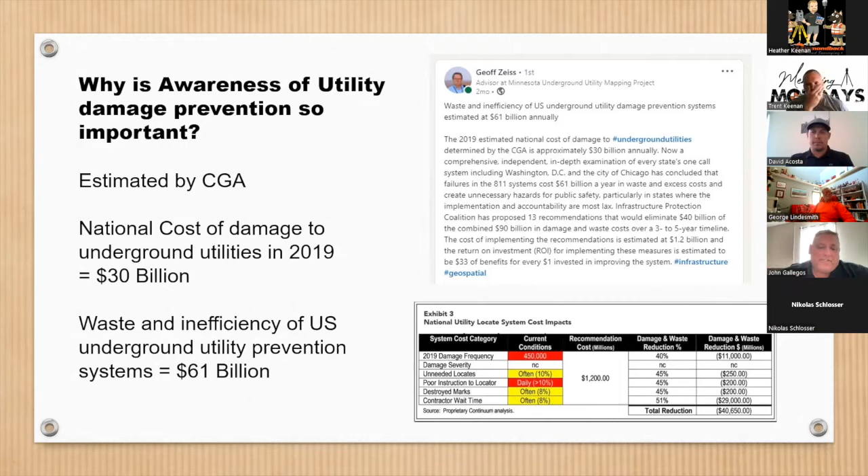Okay, so moving into the guidelines, the ASCE guidelines. American Society of Civil Engineers is the ASCE. So we've been following their guidelines, especially when looking at the level D, C, B, and A process, and we're going to get into that here and give you a refresher. But it's basically laying out how these rules are going to be.

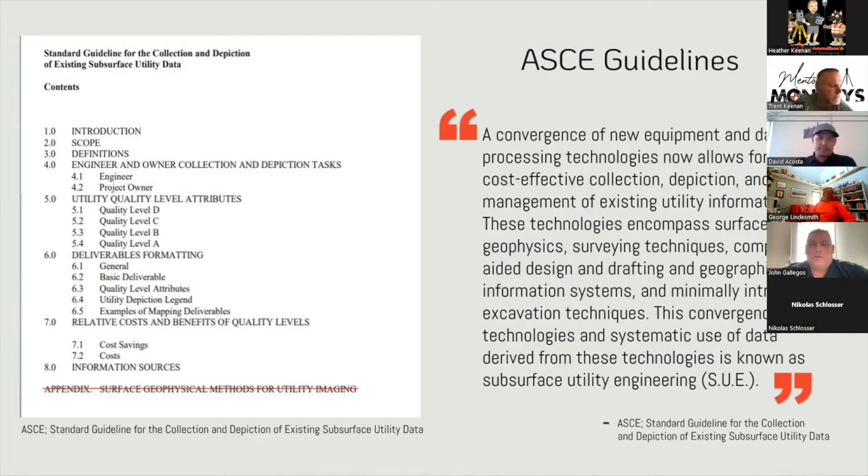One thing I found pretty funny about this document is that it has the word survey in there 25 times. I counted them. So I'm convinced that a surveyor is going to be pretty key in this process, and maybe that's why not as many engineers are familiar with it, because it's kind of a survey thing. Me and John always discuss how utilities might be brought into more of the survey world and thought of as an actual survey. We are making 3D measurements at the end of the day with survey grade accuracies, looking at maybe a particular flavor of surveying specified as utility surveying, and maybe we'd be able to adapt some of these rules, or at least meet halfway to have a great understanding between the two on how we can cooperate, because we're both going to be necessary to this process.

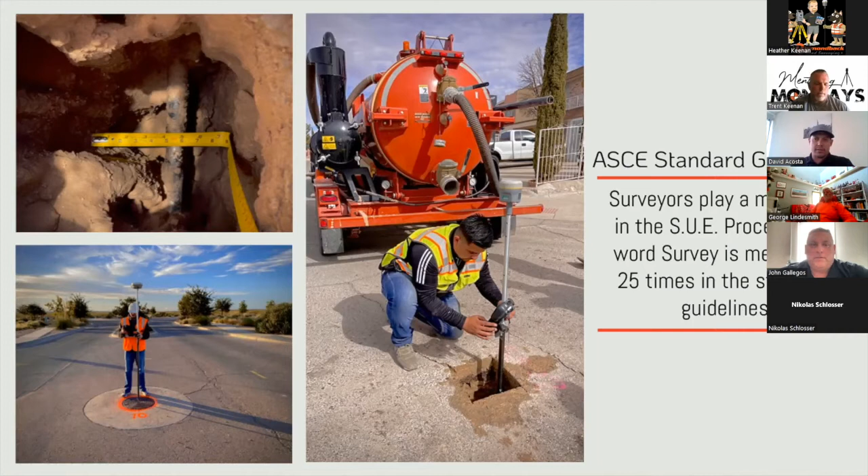So when we look at the SUE process, we have levels D, C, B, and A. The way this works is it's basically a buildup on itself. You're starting from scratch, kind of digging. It's an investigation that we're doing here. Me and John have compared this process to doing a boundary survey, where you go out, do some research, go out into the field, collect some points, bring it into CAD, maybe doing a little more research if necessary. You look through your data, go back out, do another search, and before you know it, you start to come up with a solution. So it's sort of similar in that nature.

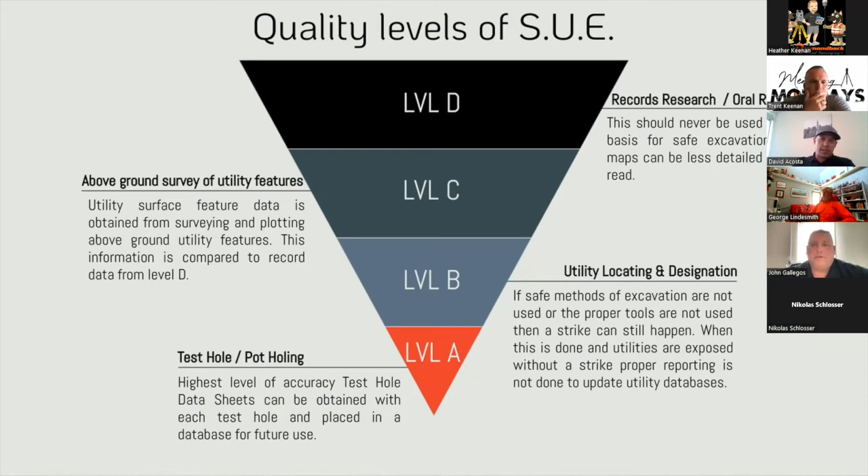So just to expand on that a little bit, I'll let John talk a little more about records research and how important that is. Oh, I think you're muted, John, sorry. My apologies. There you go.

This is one of the most important processes, and my mapping background goes a pretty long way. We used to use Leroy lettering back in the day, but I always used to see these piles of maps that used to sit in some person's corner, whether it's a surveyor or a facility person. And I was always curious, let me go dig in that pile or this pile. It was like unboxing a present, or finding a treasure. But recently, this is simply doing your diligence in terms of research, going out there, knocking on doors, being able to go in there and just talk to people, buy a person a cup of coffee or something like that. Say, hey, do you ever remember installing this line?

It's a lot of the same process as being able to do a boundary retracement through parol evidence and some of the other things. But this is the beginning stages of the information. That way they give you the oral recollection, because a lot of times the ones that know where they installed this are getting ready to retire, or have maps that aren't digitized, or they sit somewhere, and we don't know at this point whether the information is accurate or it's installed or it's abandoned or anything like that. We're just happy to get our hands on something.

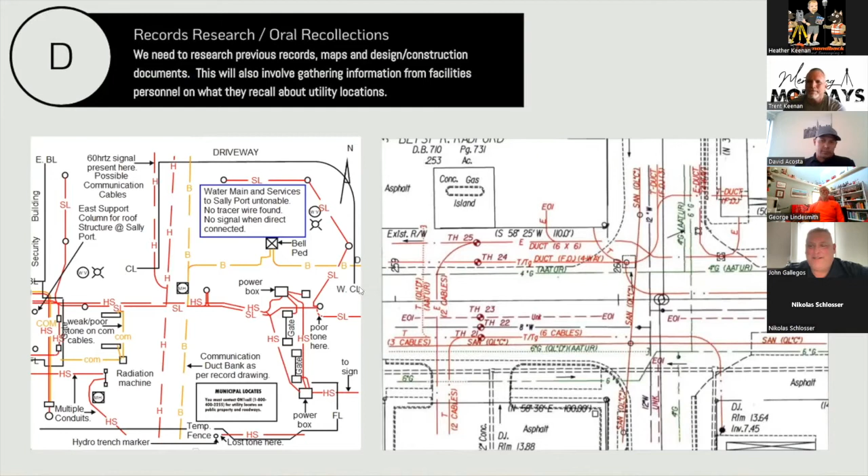So moving on, part of level D, I have a slide here on 811, because calling 811 is going to be part of the level D side: ordering that ticket for the utility owners to go mark out where they think the utilities are. And again, even on this, you're never exactly sure what you might be getting out there and how they're going to be marking those utilities. What type of information or tools they are using to do that is where it gets a little bit different from place to place.

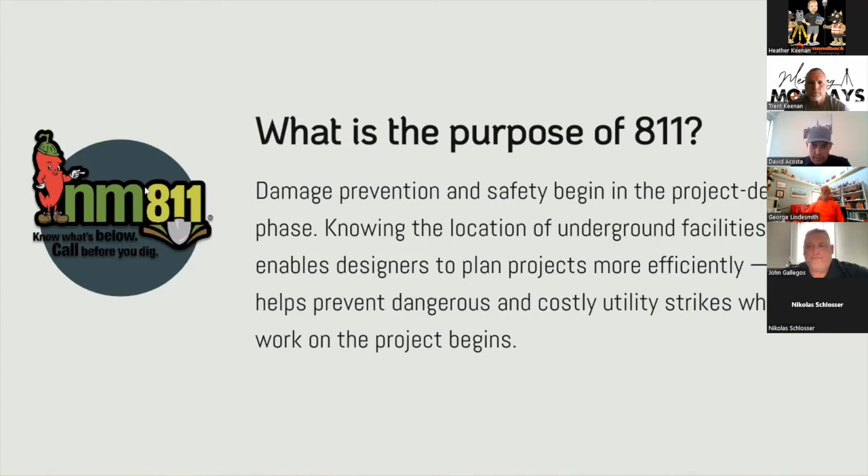Let's see, there is a difference between 811 and having a private locator, which we would be considered. One of the biggies is going to be that 811 is not going to mark utilities on private property unless there's easements or license agreements on there. So if it's a private property, you may not always be getting that extra layer of search occurring.

Calling a private locator is going to add an extra layer of risk management for engineers and utility owners. A lot of times, we're going to call 811, go out there and verify what they have marked, and compare that with any maps that we may have, or easements, or that type of information. With that being said, utility owners don't always know the exact location of their utilities, and there's a lot of undocumented utilities out there.

We were working on a project, I think it was last year, where we did a SUE survey and we found a gas line that nobody knew where it was. It wasn't marked by 811, didn't show up on any maps, nobody knew about it, but it ended up really impacting the design because they didn't have a lot of room to begin with. It was a road going up to the mountains. It was valuable information to them, but I'm sure they were frustrated. But better to have had it occur like that than they get into construction and, oh man, we have a gas line here that nobody even knew about.

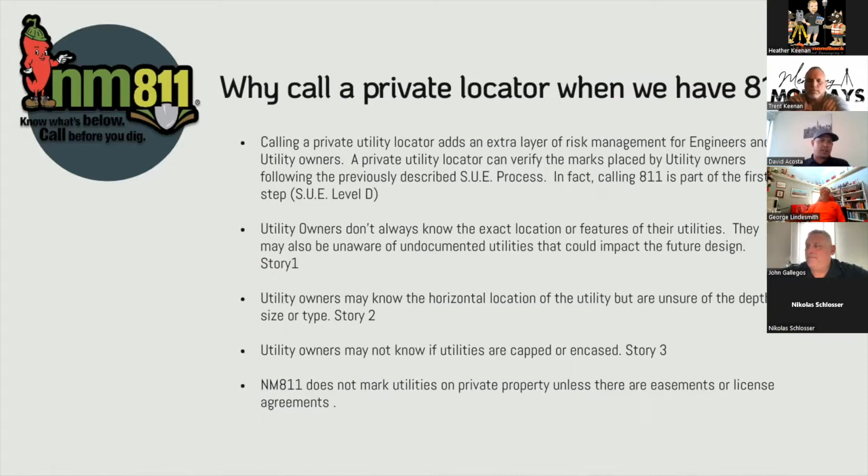Another situation that happened to us: we were consistent with where the utility owner had marked it, but they didn't realize that it had a concrete cap or it was encased. That was going to be impactful to the design, so it was valuable for them to know. So it could be a little bit of everything, right? At the end of the day, it's an extra layer. It could be considered some type of insurance that you're paying for that's going to clear you of any of these utility strikes.

And I would also like to point out to that great point, David, that the utilities industry is really probably 80% in a reactive mode, because there is so much old infrastructure in there. They do not know what's operational, what's abandoned. They don't understand how valuable the level A through D process is. A lot of times they don't budget for it because they do not know how to utilize that process.

In the first part of the design, there are situations with engineers where we said, hey, let us do a case study where we're going to do the process. We'll do all our GPR, all of our level B through D structure. And this is when an engineer had already had a concept designed for a roadway and some retaining walls and stuff. And he said, sure, go ahead and do that.

Well, when we presented him with our SUE survey and our topography survey, when they got the information, right off the bat in their conceptual design, there was no way the wall was going to work because there were fiber optic lines and a bunch of things in the way. So they had to kind of rewire the way they were thinking with this information up front, because they didn't realize how valuable it was to have it in the early stage of the design.

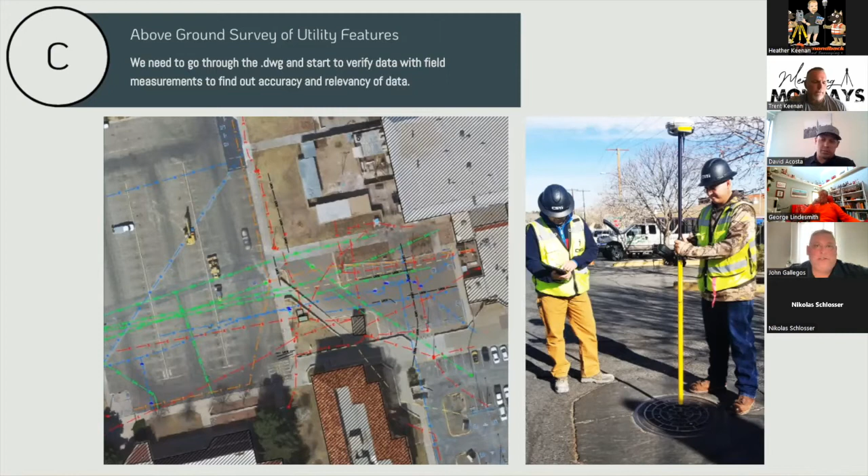And the advice that was given to me was it takes time. You've got to do it, and the more you do it, the better you get at reading those hyperbolas, as they call them, and having them tell you a lot of what's going on there. One thing about GPR, and we'll get into this a little later, is GPR itself is also not a silver bullet. It doesn't always work, but then again, it does work. It's been a good tool for us, but it's definitely not a silver bullet. We do have a lot of redundancy in the tools, and I'll get into that as well a little bit later.

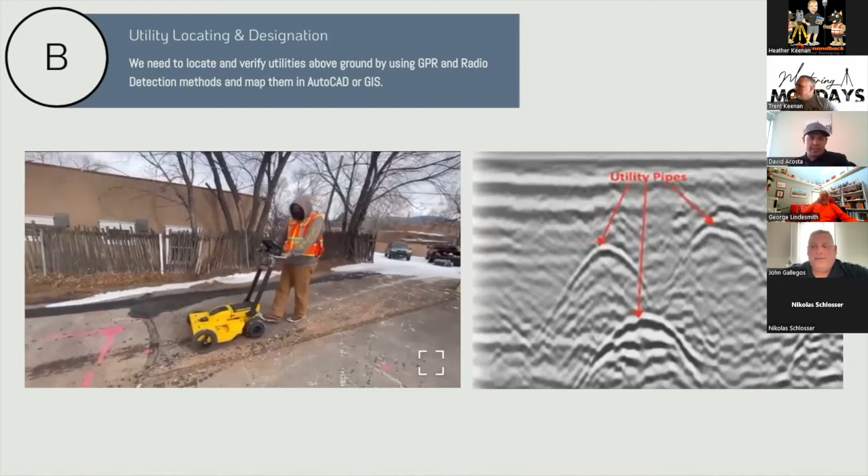So usually, like I said, at this point, we're turning data over to the engineering group, and they're going to do their conflict analysis, throw their design in there, and start to understand what kind of conflicts might happen. And then they're going to order the test holes. We call this survey CrossFit, because digging test holes is definitely a physical job. Anybody listening that's ever done it is probably shaking their head in confirmation. It's not your typical survey activity.

We're dealing with vacuum trucks and high pressure water, high pressure air, a big concern for safety. We're in the road. There's a lot going on. Sometimes we've got to get barricade permits and all kinds of stuff to do these test holes. It's a lot of work. And one thing that bugs our group more than anything is when we have a miss. There's nothing worse than digging this hole with all this work and there's a miss.

So we really try to go above and beyond before we excavate, to have redundancy in information so that before we start digging, we have a lot of confidence that there's going to be something there. And so we pride ourselves on our hit rate. Most of the time we're hitting utilities. There are some misses sometimes, but overall we have a pretty good hit rate.

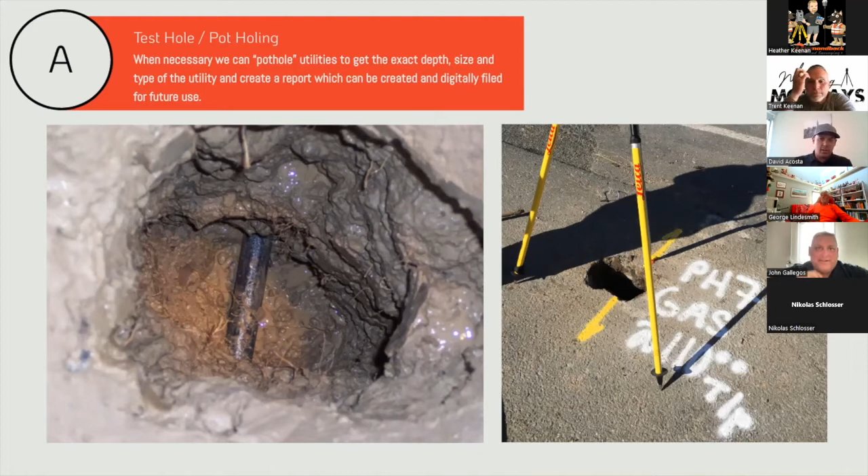And then you start to wash it, you're sucking up the dirt, you shine the light in there, and when you see this utility, yes, we did it. It's a good feeling. It all came together, everything from the beginning. This whole process, and here we are. So it's really a cool thing. And I think it's important to point out too,

when 811 places markings on the ground here in New Mexico, the buffer of accuracy is plus or minus 18 inches from the center of their mark. So you have a 3-foot window. So if you're in the middle of a street and you've got to dig a pothole about 10 inches in size, and you're plus or minus 3 feet, that's a 3-foot patch you've got to put in the ground, and you've got to take the soil out, put it back and compact it.

So that's why the quality of information, from D all the way through A, is important, and why it's important to initiate these processes and have a good hit rate. Yeah, and there's no other way to tell the exact size and type without physically seeing it. Up until that point, we're using these tools to make those assumptions, but we won't truly know until we've dug the test hole.

So when we were working on this, it made me think about the accuracy and precision diagram that we had back in school. You have a mark on the ground, and typically it could be 811, it could be anybody. The survey crew doing a design topo is going to go over there, see that mark, shoot it right in the middle of the mark, and take it back to the computer. The engineer may think, oh, this is survey grade information. Where they shot it is the true location of this utility. Let's go ahead and do some design.

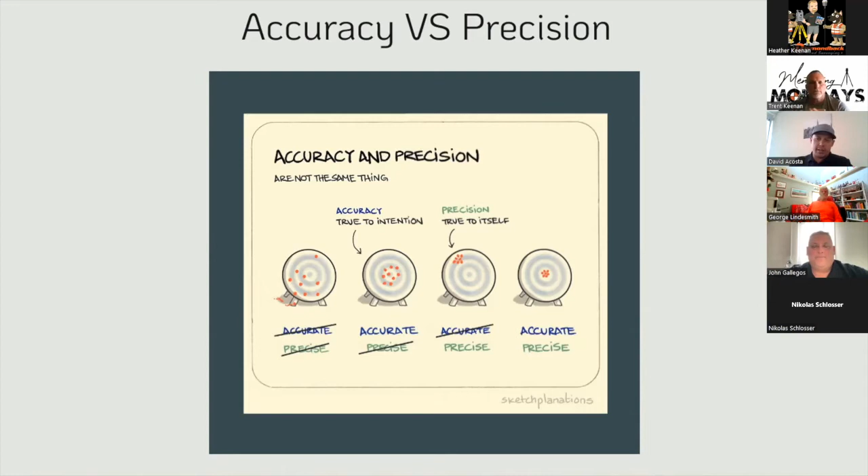But when we can have this here, that's when accuracy and precision line up. If I can physically put my rod on the top of that pipe, accuracy and precision, or if I can make a reference mark above ground that has a direct measurement to that, we have accuracy and precision. Now we're really surveying. To me, this is surveying right here. We're lining up everything. It's not just an idea, not just an assumption, but here it is, some good hard information.

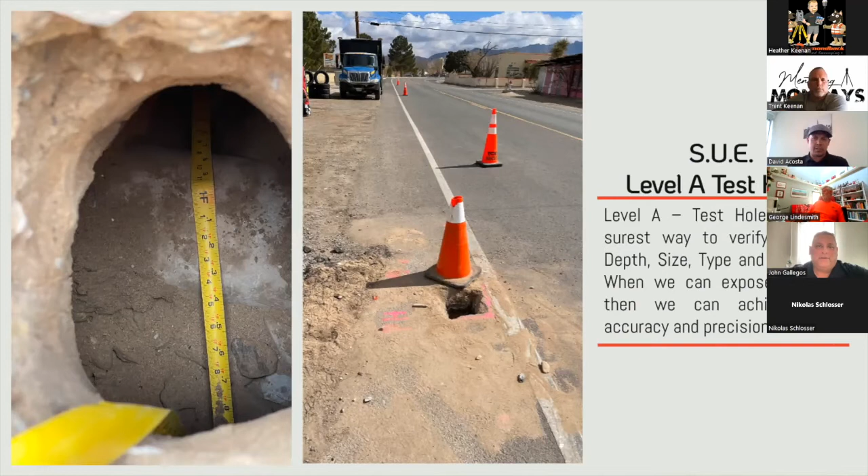I think another good thing to add is to pay attention to these 811 locators. A lot of times they don't have an instrument in their hand. All they're doing is marking the same mark that they placed on the ground with flags and all of that. How do you know that it's not over here? Or how can you tell them, hey, I actually found the utility 4 feet over here? How are you able to convey that message to them? Again, putting paint on the ground is different from actually doing your diligence, using the equipment and putting the records together.

And a lot of times we'll dig these holes, and because we always put reference marks in line with the utilities, they serve as a point of awareness. So when somebody comes behind us and 811's out there, they're going to say, oh my God, the gas line was over here, but wait a minute, there's a pothole right here, or a test hole or keyhole. I better move my line over, because now it's 18 inches in this spot, but we don't know what it's doing another 100 feet down the line. So we are essentially creating additional awareness by putting those reference marks on the ground.

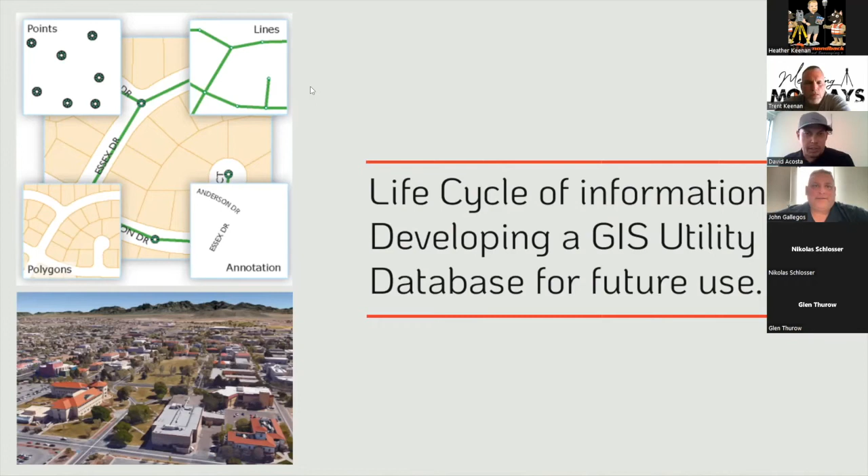Like John said, it's leaving information, footsteps for the people following behind us, and being able to leverage GIS and this tool I'm going to have in my pocket anyway, plugging in some great information. Because something is better than nothing in a lot of ways.

So we look at this data life cycle here. We've got a new project, the design survey and the SUE is ordered, and then the design goes into design phase. We have a double arrow here because sometimes stuff could happen and we have to go back to SUE or back to design. But then the design's completed and goes into construction.

We do the as-builts, and this is key, because the request for the as-built has to be proper. Otherwise, if it just says as-built survey, what the heck is that? Why not be more descriptive on what you want out of the as-built survey? It could even be a utility as-built survey. That as-built data can be moved into some sort of database managed through the continuation and life cycle of that site or building.

Things could be changed before something really major takes place, but then we go into the new project. So it's all a regurgitation of this information on a site and this life cycle. The more we can get better at archiving and cataloging this information, what's being done between projects, we're going to start projects in a lot better place than just starting with nothing at all. We want to encourage our clients to consider this, so we're making better use of funds coming to these projects, and it just makes more sense to us.

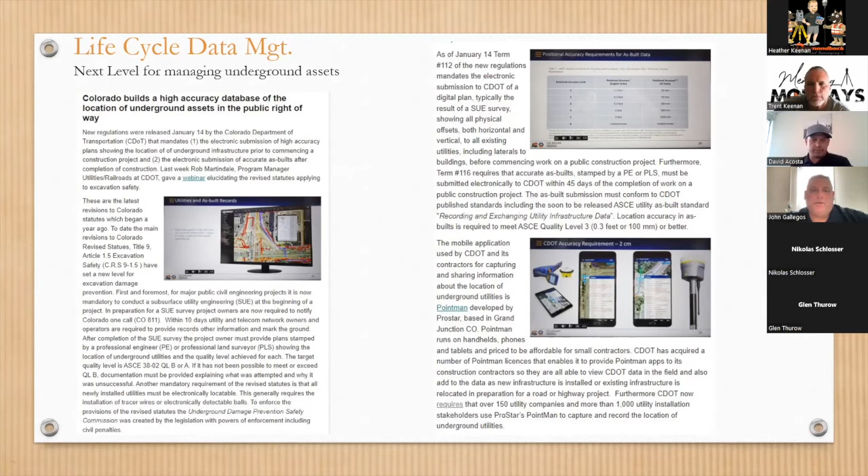So again, developing the database - this was some stuff for New Mexico State, and we were talking about mapping the whole campus. Whoa, the whole campus, that's a huge undertaking. That's probably not a great idea to go attack all at once. But what we can do is look at areas where people are going to be working. Let's look at the master plan - where are we going to be operating under, and how can we start to narrow it down there? It was kind of an idea for a lot of municipalities that want to start implementing this, because it's a huge undertaking, especially with bigger cities.

John mentioned a little bit about BIM. BIM is going to probably be a Mentoring Mondays topic all in itself, but it's pretty cool. It's using the same idea from design to asset management, facilities management, and all the way back into construction. It's a great process that can be followed to achieve that. And it's a cool thing, so if you've never heard of BIM, I recommend you investigate it.

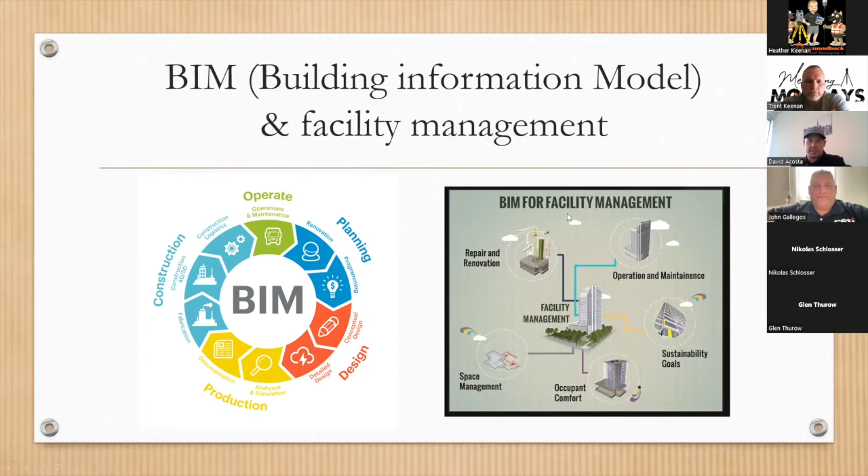Okay, just to talk a little bit about the technology - I think we have a few slides left here. CSTi, we really love technology. We're always wanting to get the latest and greatest that we can have available to us. It's just kind of what we like doing.

So down at the bottom, you can see a few of the GPR receivers that we have that are all GPS integrated - that's GPR with GPS. When my friend first told me about GPR, I thought he was saying GPS, and he's like, no, GPR. And I'm like, what is that? Oh yeah, you can use it to look for voids and all this stuff. They use it out here in Texas a lot.

And me and John had already been asked enough times about utility locating that we thought, let's give it a shot. So we rented our first GPR system, and it was delivered to the office, and we pulled it out there, and we were like, what the heck is this thing? It just did not look like a survey tool or anything we were familiar with. And we went out to go find some utilities that day.

I was looking for a high pressure water line, which from my experience is one of the more difficult things to find. And I'm so frustrated, I'm turning red a little bit because the contractor's looking at me like, hey man, I thought you said you could mark utilities here. And I called the guy that rented us the GPR - hey, what's up, man? I'm having difficulties out here.

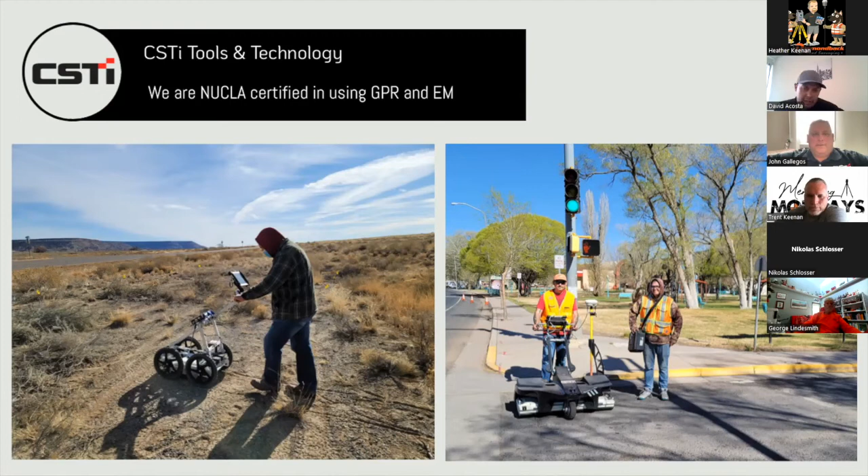And then with the GPS integration, it's cool on there because it's all going to be geo-referenced when you plug the data into the software and putting it into design drawings. Everything survey grade, geo-referenced information. So it's a really cool combination of tools to put together to do what we like to call our utility survey, because we're using survey tools.

We talked about the redundancy with our tools. And so we're talking about using GPR, electromagnetic detection, radio detection, all materials locator. That's the tool that they're using on the bottom left. It kind of looks like a paintbrush, but it's been effective for us as well. CCTV is another tool that's commonly used. And then also the dowsing rods that we talked about.

And dowsing rods, this is always a fun subject to talk about, because some believe in it, some don't. I don't know why, but recently it just hasn't really been working for me. I don't know if I'm thinking about it too much or what, but John gets them in his hand and they just happen to work better for him.

And one day we were standing there with a guy that's a physicist, right? What was Carrie's friend? A physicist, right? He's an archaeologist. Archaeologist, but he was doing some crazy stuff with those dowsing rods.

He would call out your name and then it would move to you. And he'd be like, John, and it would move over there. David, it'd move over here. And it was just kind of funny.

But there are some cool tricks I've seen where you're holding the rods out, and when you go over the utility, they move in, right? They move in like this. And when you walk away, they move out. So you're over some sort of object under the ground when they're like this. Then I've seen people stomp their foot and then the things go out like this and then they come back. And however many seconds that took is however many feet underground it is, right?

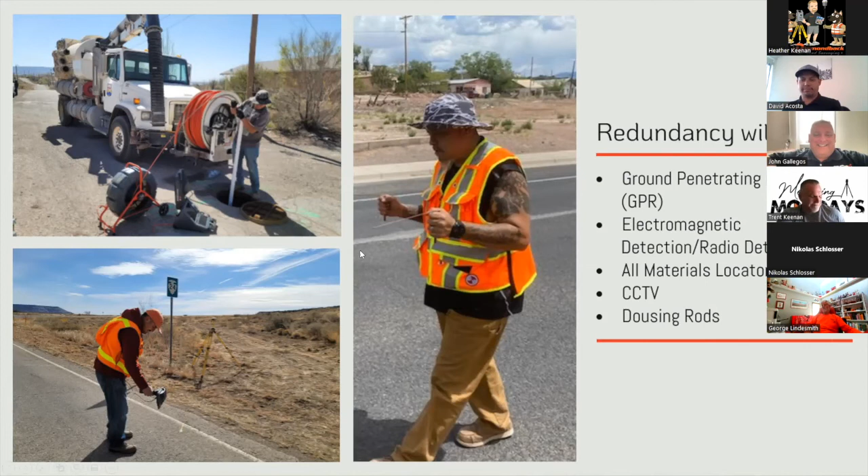So just since we're talking about tools and technology and GPR, there are some GPR misconceptions, like I mentioned earlier, that it's not a silver bullet, it doesn't work every time. How accurate is GPR is the question we get a lot. And so it's a loaded question when somebody asks you that. When anybody asks you any of those questions that we're looking at there, the last three, it's a loaded question,

because we live in the desert here. There's a little more sand, there's a little more air in the soil. So we might be a little bit more successful with it here. So there's just a lot of, and John, maybe why don't you speak on that a little bit.

Yeah, it all boils down to soil condition and application. You have to do your diligence in terms of looking at how you have to do a sample size in the area in order to be able to know what the expectation is, because you don't want to create a false sense in the industry, or oversell GPR, and say, oh, it works in soils and all this and that.

Yes, there's a lot of things you can do, but there's a lot of post-processing, a lot of different things that you have to do to apply to that condition. But a lot of times you simply cannot get there. It has a limitation. And it is a loaded question.

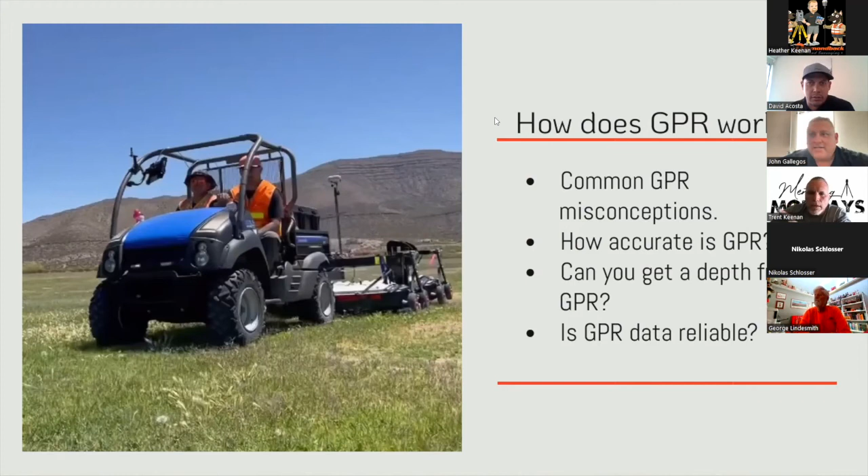Oops, I gave you the one. So this is just putting records together. You got the typical grid, sewer, fiber optic. Wait, are you sharing it? Yeah, I thought I am. Let's see. Let me stop mine. Oh, yeah. Okay, there you go.

So this is a project in Albuquerque, 12th and Sawmill area. You see the water, you see the sewer, you see the fiber optic, and this is all a combination of C and D data. So the next step is, let's go out there and do the blind taste test, get our GPR out there and have him just do what we call interpretations, looking for all the obvious pipes and all of that.

And at the end of the day, when we extracted that, the magenta lines are the lines that he was able to look at. So you can see that there's a considerable amount of utilities in there with the GPR that they would have never found just through the records. So again, here's without, and here's with. So those are all the anomalies, right? Right, because we don't know what they are. These are patterns that could mimic a utility.

We don't know if it's abandoned or not, but we know that there are some that line up with some of the stuff that's underground, like some of the water. That looks pretty good. That's a level B, so that's designated as the correct location of the water, because we're going from a C to a B in terms of quality information. So that's the benefit of GPR, it's an independent redundancy check outside of the records to overlay this survey-grade data and look at what's good and what's not.

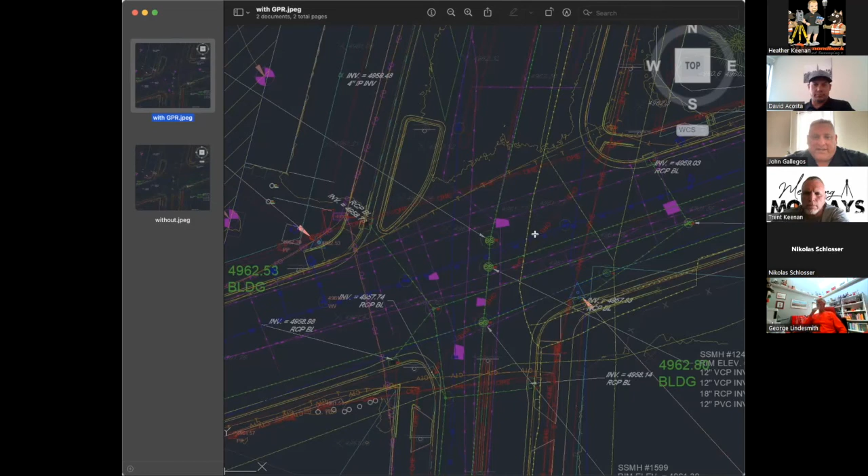It gives the engineer the ability to ask questions like, well, what happens if I install a sewer? Obviously you have a bunch of stuff in here. You're not going to dig every single one of these, but you're going to pick out the ones that match the records. But you also have to understand if they give the contractor this map that says, hey, we did a GPR survey, you're kind of pushing the liability on the contractor to dig with the shovel through here because there's a lot of stuff.

And at the end of the day, that's what you're trying to do, create awareness and let them know that there's more than meets the eye underground, because it's better than what this would have been, and who knows what all this other stuff would have been, and it would have been catastrophic. And plus, time is money, right? You would have messed up the schedule because they didn't have this information in the initial design.

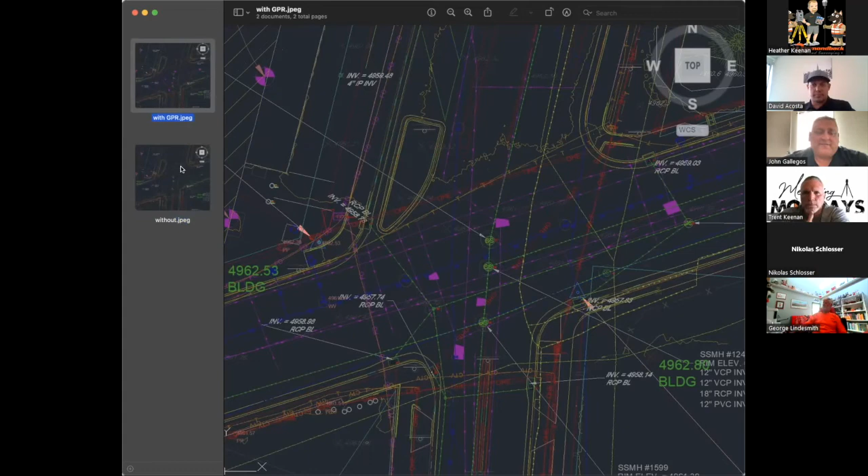Okay. Yeah, certainly creates a buyer beware situation there, huh? Yeah. Okay, let me share here again. Okay.

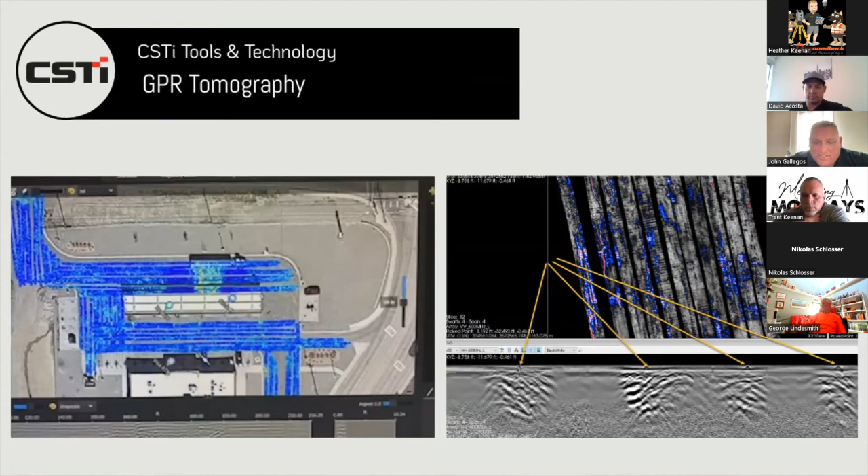When we were coming across this, I was like, look at this, David, this is very interesting. This is where the water was going through the pavement, and it was intruding into the road base by over 48 inches. And I think we only had maybe 1 inch to 2 inches of rain in this area, which is very rare for this area. But this is what's getting in the roadway and causing the failure. So it was a good case study for the engineers, look at what water does to road surfaces once it gets on there, and these cracks are not rehabbed or replaced.

So it's a good example how GPR can apply to different methods, even when you're not initially using it for that. But I thought it was a pretty good capture. Yeah. So water could be the enemy of GPR a little bit. But if you're hunting for water or voids, there it is. Well, you'll be able to see it as well. So it's another use for it.

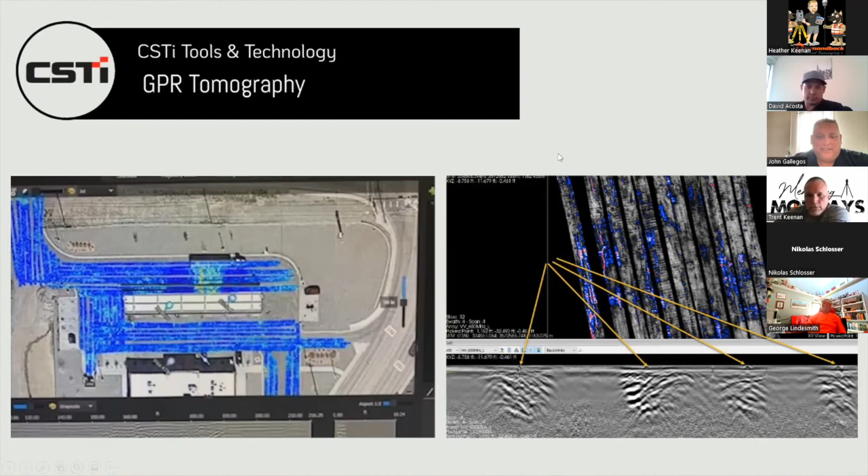But if the data is not survey grade data, things aren't going to align where they need to be, and it's just not going to be a good usable tool. It won't be used the way it should be. So that's why we want to get the data as great as we can, as accurate as we can, because it could be utilized in a platform such as this. So it's pretty cool how it also leads up to augmented reality.

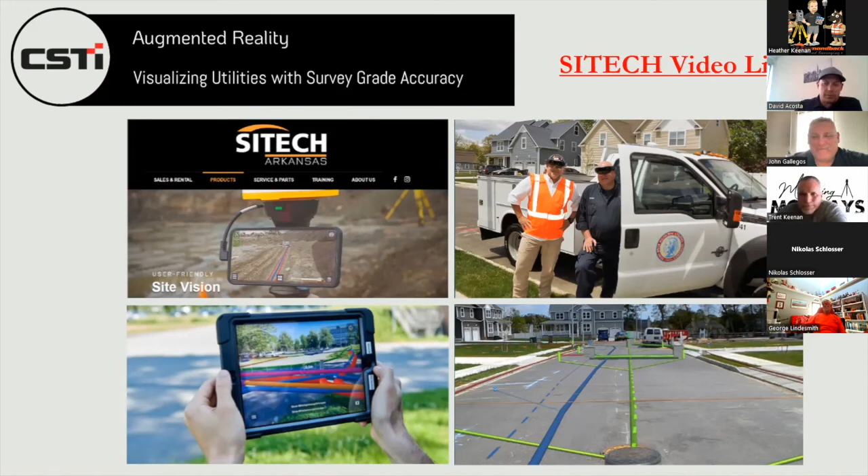And here's another few slides. You're looking through the augmented reality. You can click on this hydrant. It's got all the metadata associated with it, and it's a pretty cool thing. And then here on the left is just kind of more of a graphic of a tomography slice and how that pipeline might look in there.

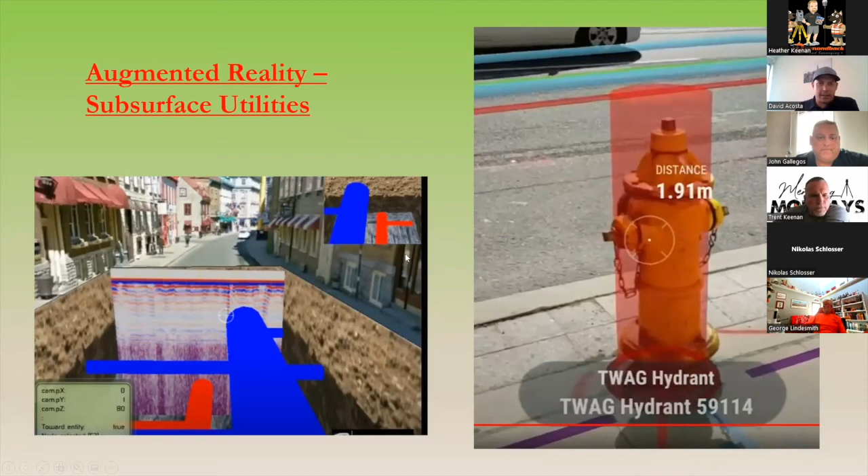I'm sure some of you have heard about the Field Link, the Trimble stuff that's coming out, and that also goes back and forth with BIM and being able to take these platforms to a construction site and doing checks and as-builts by leveraging augmented reality and comparing that with models that are built out in the field.

We used to do more BIM coordination projects, and so we got to learn a lot when we were doing those. So if you get to build it virtually, you basically have taken all the conflicts in terms of the HVAC systems and the footing systems, and you've solved it before it even gets to the point of creating a change order or anything down the line.

The greatest thing about that is that you build it virtually, you solved all the issues, but the hardest part of BIM is how do you keep them in compliance to make sure that they're following the system and installing it correctly. So that compliance part is a huge thing after you put in all that work. Yeah.

So that's our last slide there.

One other thing that's just kind of interesting I'll throw out is, through us being able to do utility investigation, it's also brought on people that are interested in subsurface investigating, like historical societies, people hunting for treasure, cemeteries, a little bit of everything. And it's kind of gravitated towards us. I don't think we initially anticipated being involved in some of those things, but it's kind of become a big part of what we do as well.